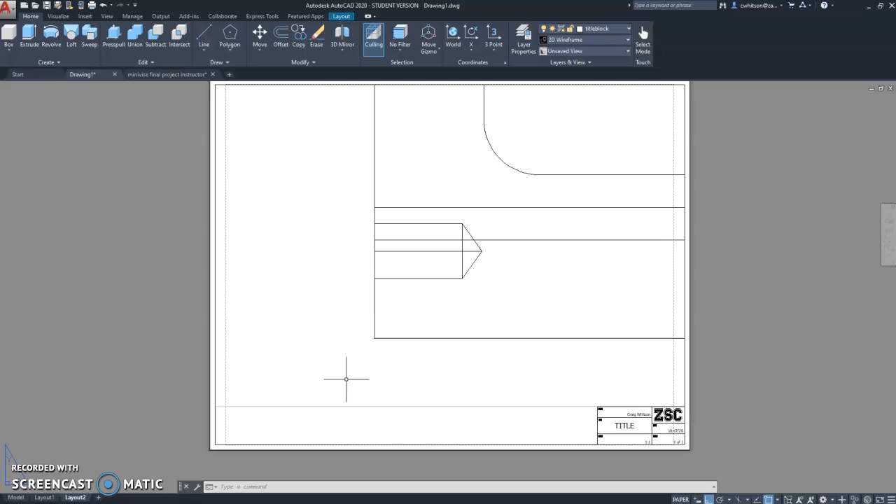Right now I have my layout set up as you probably have, with an A size sheet and a C size sheet, which we've used earlier in the semester. When dealing with 3D projects, we don't need a viewport, so I'm going to go with my C-sized sheet. First I'm going to select that viewport and delete it. We do not need that.

Let me show you what I think is probably the simpler way to convert our model into millimeters. This is a way I've recently discovered that is a lot easier than what I posted before on Blackboard. But actually, to do that, I think I'm going to need my viewport back. I guess I wasn't thinking far enough ahead. Let me hit undo to bring that back so I can double click inside the viewport to activate it, which gives me my list of viewport scales down here.

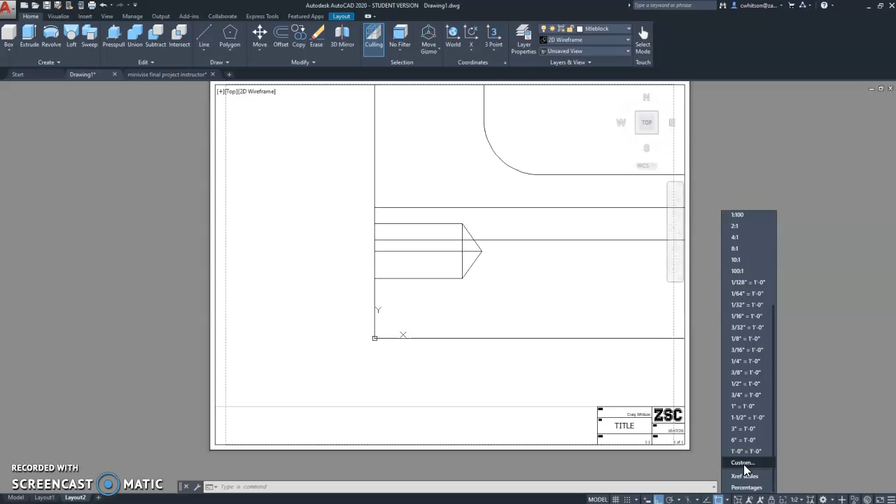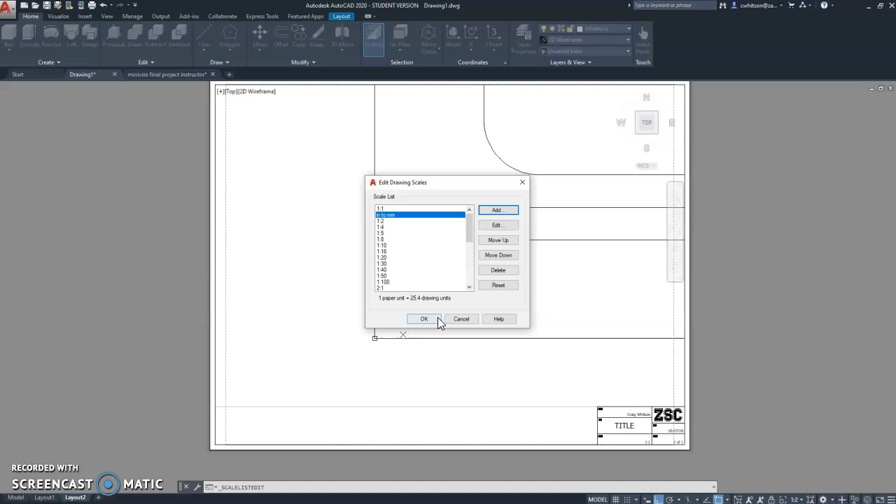So I want to create a custom scale, and I'll add a new one - doesn't really matter what we call it, inch to millimeter. One paper unit will be 25.4 drawing units, and that is the conversion from inches to millimeters - there are 25.4 millimeters in 1 inch. I'll click OK and OK.

Now that I've created that scale, I can select my viewport and get rid of it. Since we're not using viewports, the way we get our 3D model into our Paperspace is to click on this Layout tab and start by placing a base view from the model space.

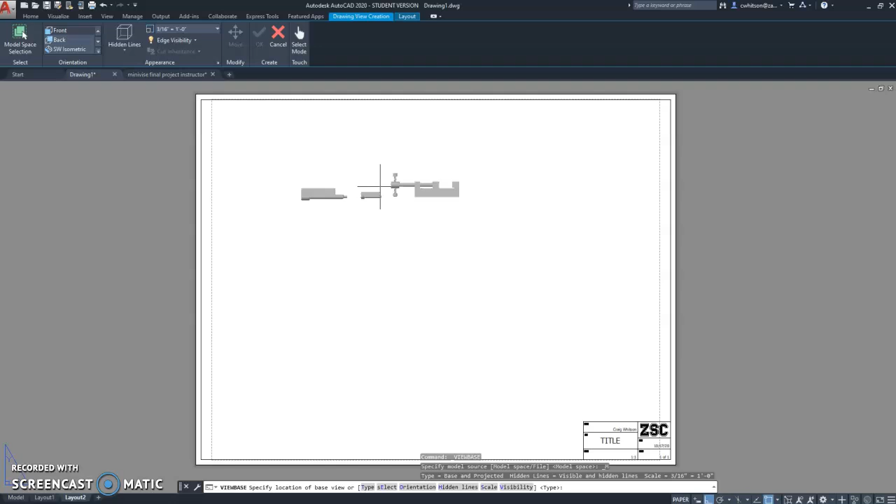Now what many of you have noticed is that when you do this, AutoCAD automatically wants to choose everything in the model space, every single part that you have created there. And we don't want to do that - we just want to place them one part at a time.

So we'll come up here and click on Model Space Selection, and that takes us back to our model space. Right now everything is highlighted - you can see these dotted lines along the edges. Everything is selected, and we don't want that. So we want to unselect everything but what we want.

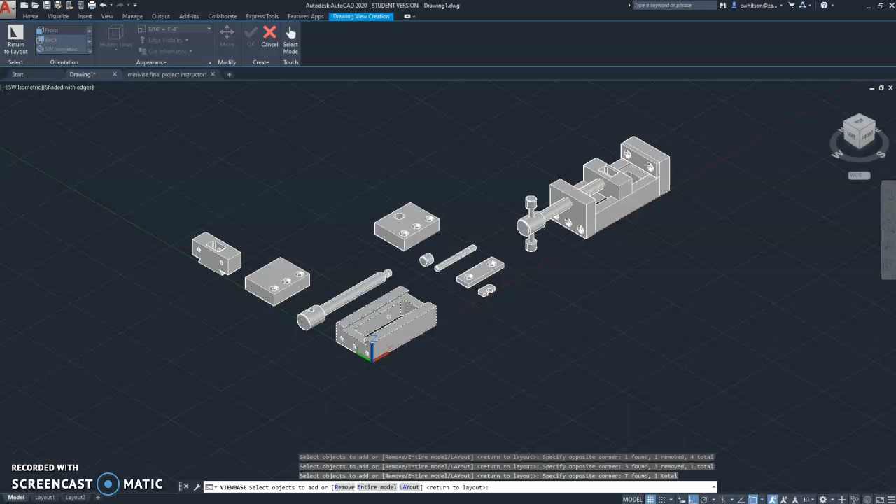If I want to first place my two views of the base, I want to unselect everything else. So I'm going to hold down the Shift button and click on everything else that is not the base. I think I've done that now - I think I've just got one object remaining. You can look down here, it says 1 total. So I've just got one object highlighted right now, the base. I held down Shift and clicked on everything that was not the base.

Now I can return to Layout, and I can choose which view I want to place first. I think I want to place the top view - yeah, there we go, that's what I want to be my front view. Then I'll project the side view from that. But I need to be careful about what scale I choose up here. AutoCAD is going to automatically choose one that it thinks will work, but that's not the one I want.

I want to find the custom scale I made earlier - this is going to convert my inches to millimeters. And then I can just click to place the base view, and move my cursor over to the right to make the right view, and hit enter. There we go - I've got my two views of the base.

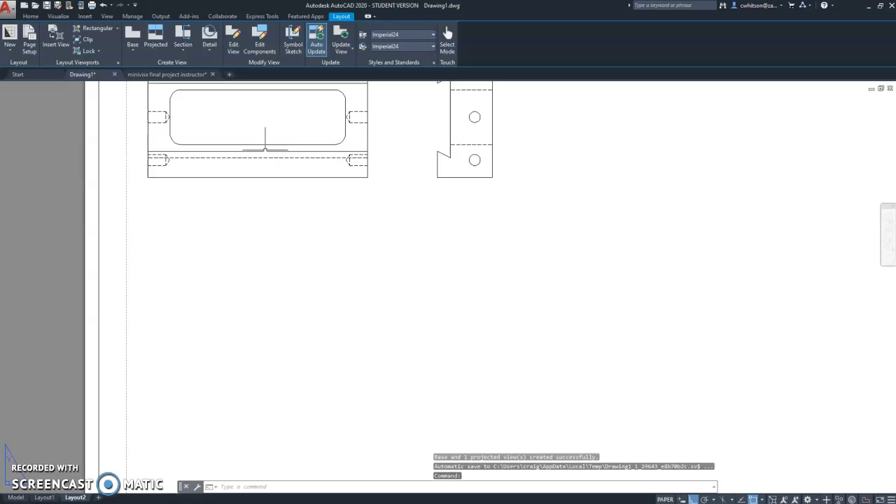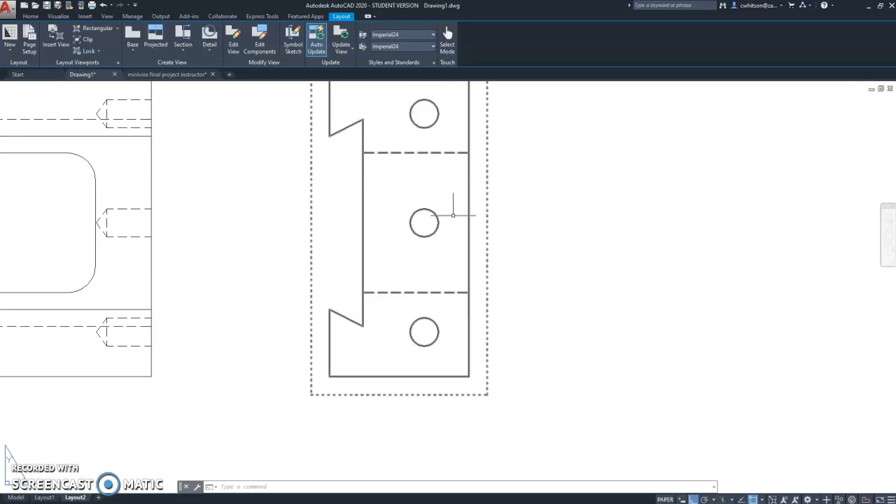So there's still some more I need to do with this. I'm going to need to go in and add all of the dimensions, add center lines. Some students have pointed out, if these are threaded holes, shouldn't we be seeing a hidden line hole surrounding them? And yes, that's not created automatically by AutoCAD - we're going to have to do that ourselves, add that hidden line circle surrounding our threaded holes to indicate the presence of threads. We're going to have to add all the center marks, all the dimensions and notes and leaders and stuff.

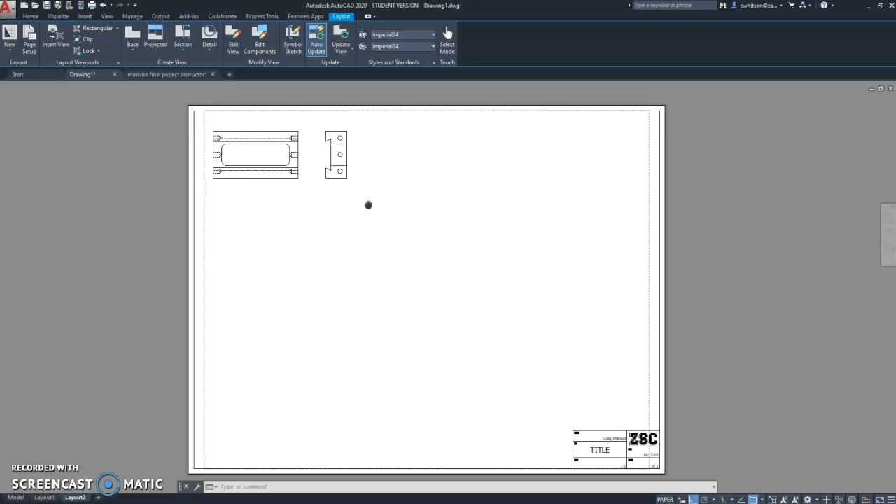But that's how you can place one object at a time. Now, the benefit to doing your model as a 3D model, I think the biggest benefit, is when it comes to that assembly view. So if I place a new base view from the model space, again, go back here to select what we want, or rather what we don't want. Hold down the Shift button, pick all those parts that we don't want.

The thing about the assembly view, depending on how you have it oriented in your model space, the particular isometric view that you want may not be one of the ones in the list you can choose from. So I'm going to rotate around to this particular view. This is the isometric angle of the assembly view that I want. I want to make sure I'm viewing it this way in the model space, so that when I return to the layout, I can choose current as the view that I want.

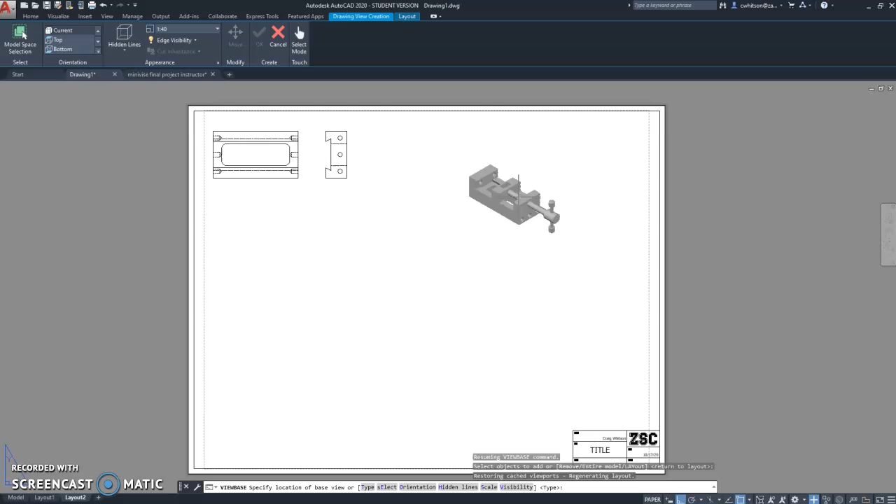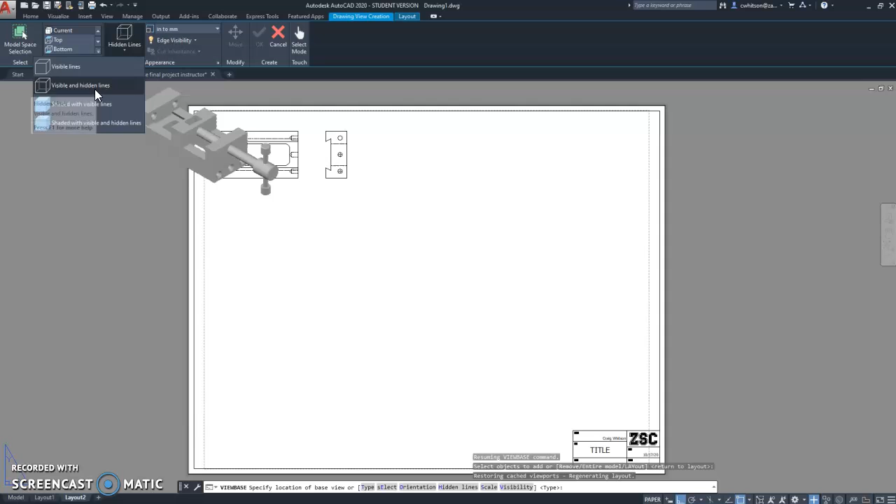Now, isometric views don't always have to be the same scale as the orthogonal or orthographic views, but I'm going to go ahead and use that same custom scale. And the isometric view, I don't want it visible with hidden lines - I'm going to make it shaded with visible lines. Then I can place that up here, hit enter, enter, and there we go. There I've got my isometric view.

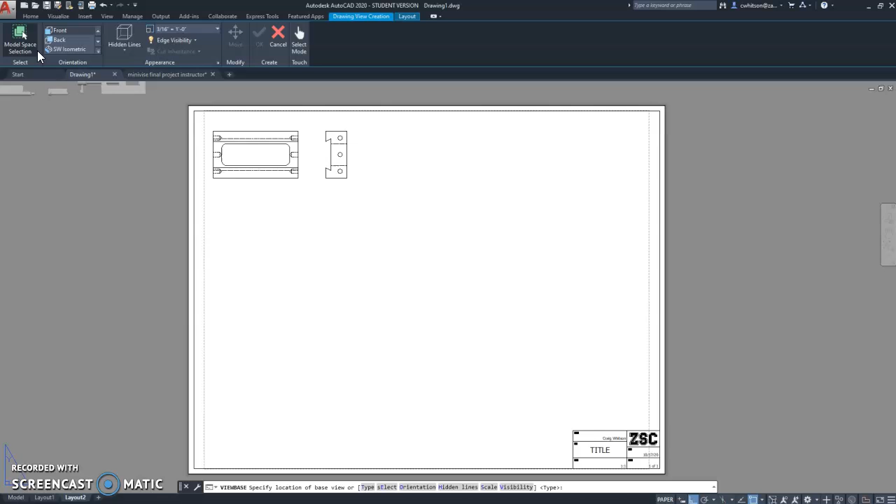Now, if I hadn't set that, let me just undo that. And go back here to select or unselect everything that's not part of my assembly.

If I hadn't changed my orientation, if I was still looking at it from this isometric angle, and I return to the layout, and I choose my orientation - okay, the current view is going to make it like that. I don't want that view.

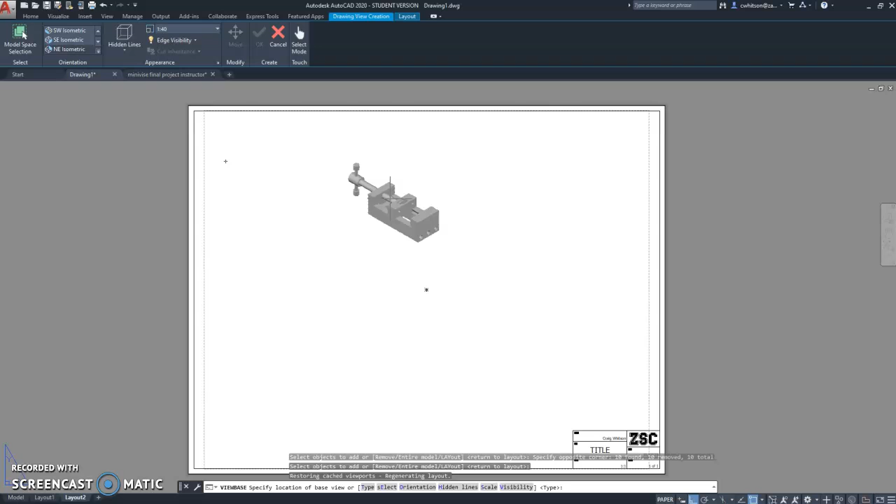But if I look at the other isometric options: southwest, no, that's looking at it from below. I don't want that. Southeast, no. Northeast, no, that's not quite right either.

It's the handle facing the wrong way. I want the handle facing down and to the right. Northwest, no, that's not right either - now the handle's facing down and to the left. I want it down and to the right. So you see, none of these isometric options work.

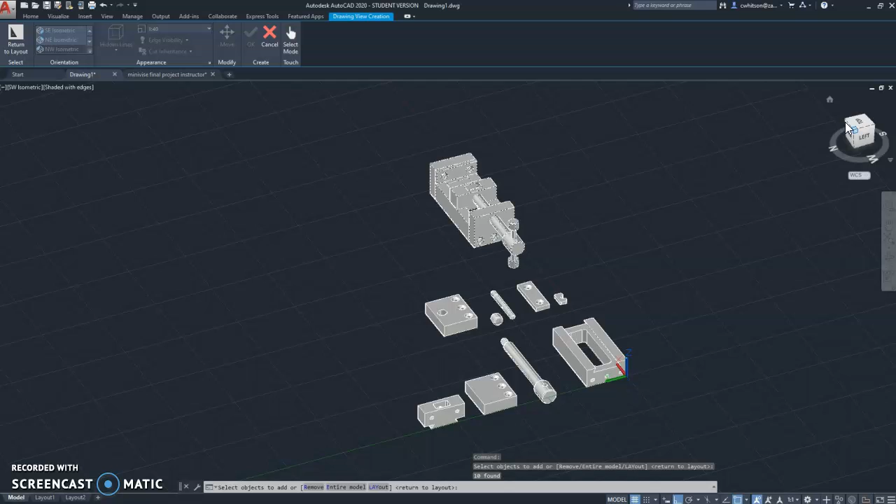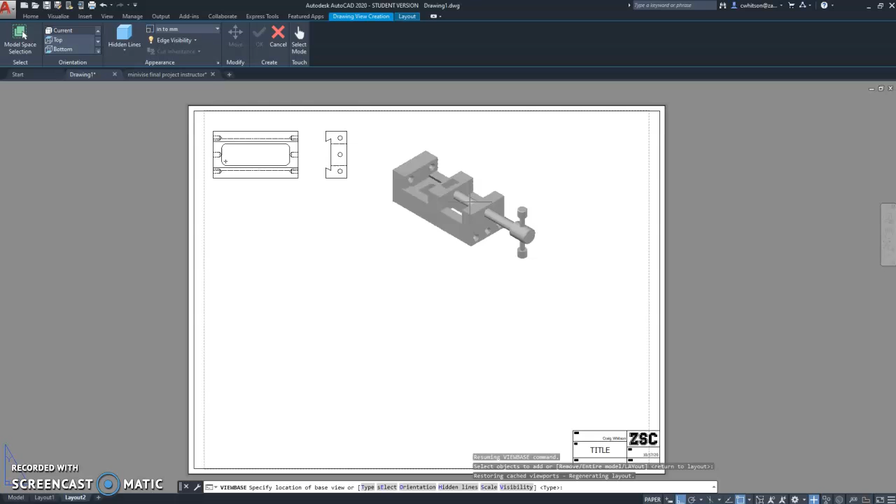So when that's the case, what you have to do is go back to the model space. You have to reorient the 3D model in the model space to agree with how you want it to look in the Paperspace. Then, as far as the orientation options go, choose current, shaded with visible lines, and again I'm going to select my custom scale that I made. Say OK, enter. Alright, so that gets you your isometric view.

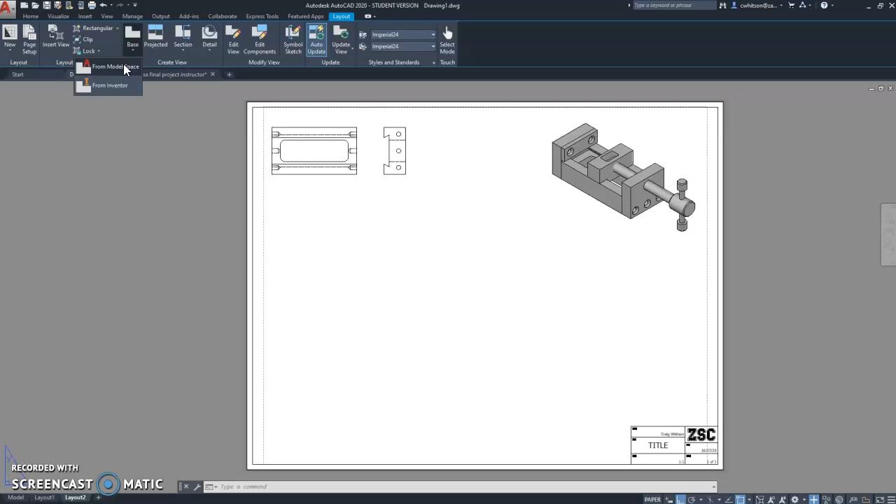And then you just go through and repeat this process, placing all the other views. So I would place another base view from the model space. I have to go back here, and let's say I want the drive screw now. I'm going to have to hold down the shift button to unselect everything else that's not the drive screw, including all of that.

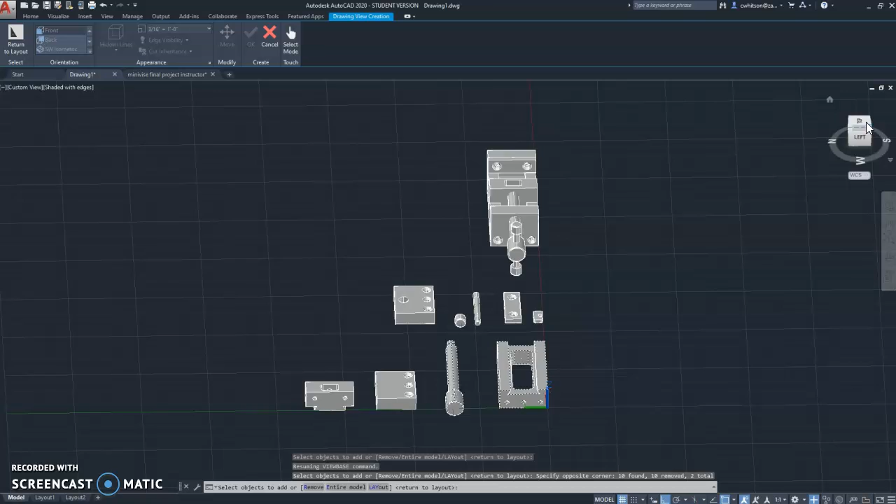Okay, and then return to the layout. And actually, I forgot the base - it looks like there's something in that selection that's not the drive screw. There we go, now I've just got the drive screw. It's really important, don't forget to choose this custom scale.

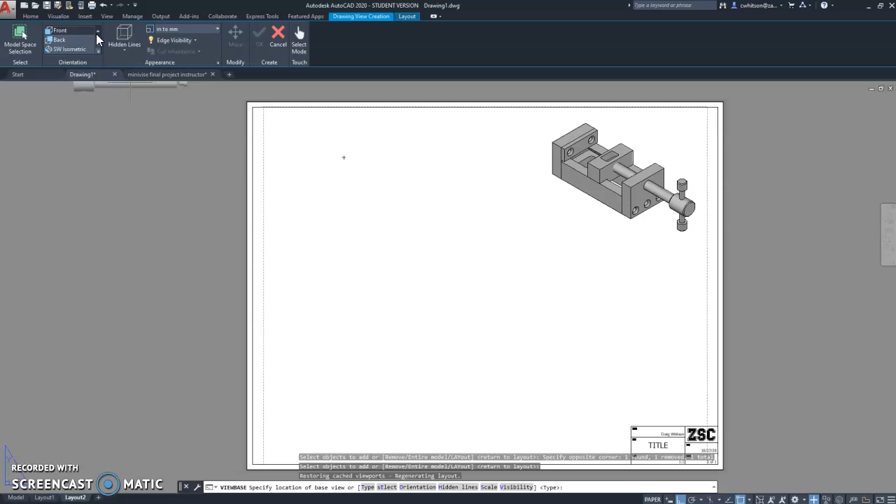Yeah, I do want it to be hidden line. I do want it to be front - that particular view is correct, front view is correct. And I'll just place the front view and the right view. Enter. And there, I've got my front and side view.

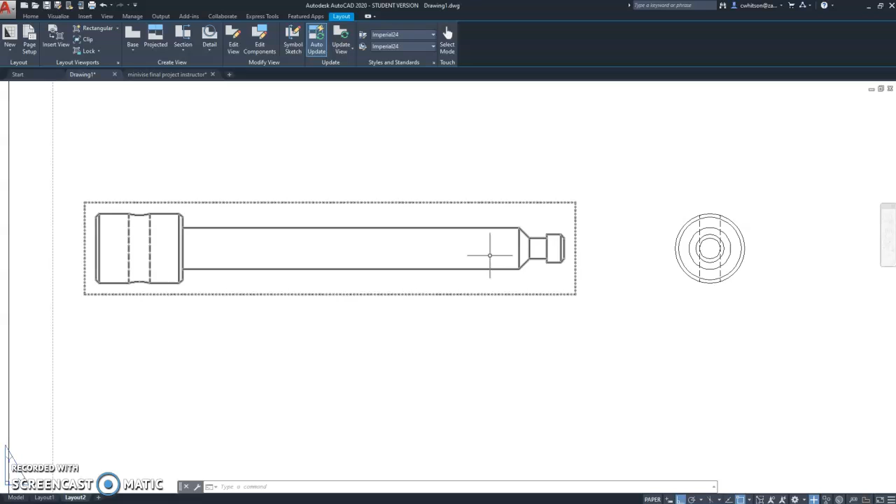Now, the drive screw here is supposed to be threaded, and I have it modeled just as a plain cylinder. So in order to see those hidden lines, I'm going to just draw them in manually. So I'm going to switch back to my drafting and annotation view. I can switch to my hidden line layer.

Maybe I don't want cyan lines. I can change the color. And then I can go ahead and draw a line there.

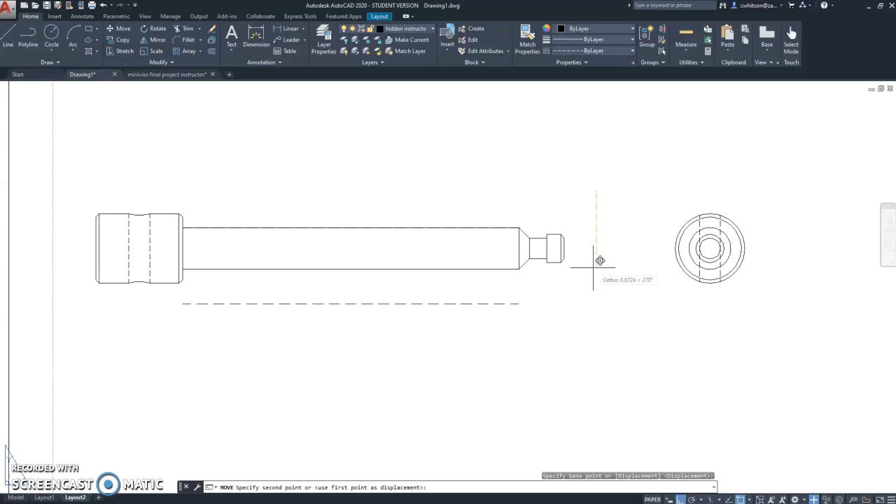Now, the exact placement of the hidden line is not critical. We're not actually trying to literally show the width of the threads. We just want to essentially represent them with a symbol. This dashed line is meant to just indicate the presence of threads. It's not meant to literally represent what the threads look like.

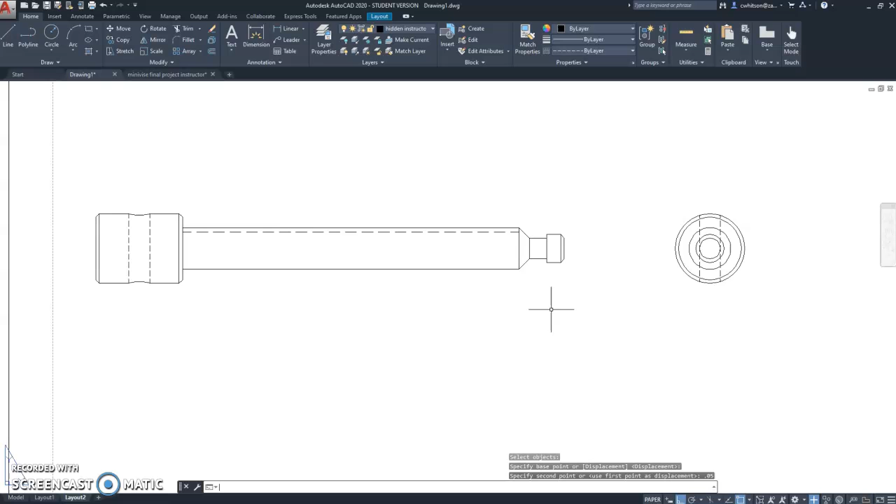So maybe 0.1 - that's probably too much. So maybe I'll move it back up to 0.05. That's getting a little bit better. Yeah, I'd say that looks okay. And so then I can maybe just mirror that line across the center of the part.

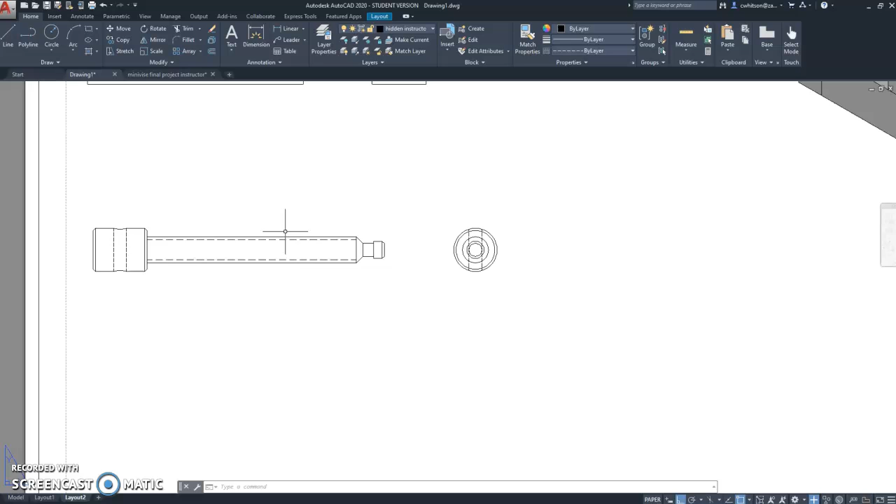Okay, so you'll just have to repeat this for all the other parts. Add the hidden lines where necessary to show threads. Add all the center lines. Add all the dimensions, annotations, the parts list you'll need to add. But that's the basic process of placing our model in inches into our Paperspace and converting into millimeters.

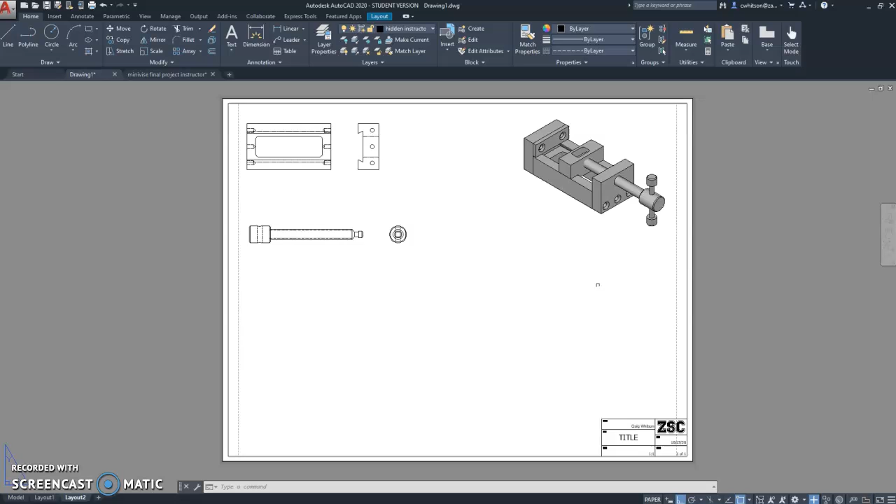I'm not even sure - I don't think I have time in the video to show the other way that I was going to recommend. Maybe I do if I try to do this quickly. But I'm going to recommend this method that I've just shown as a simpler way of doing it. The other way we could have done it is if we had gone to our page setup and modified this layout.

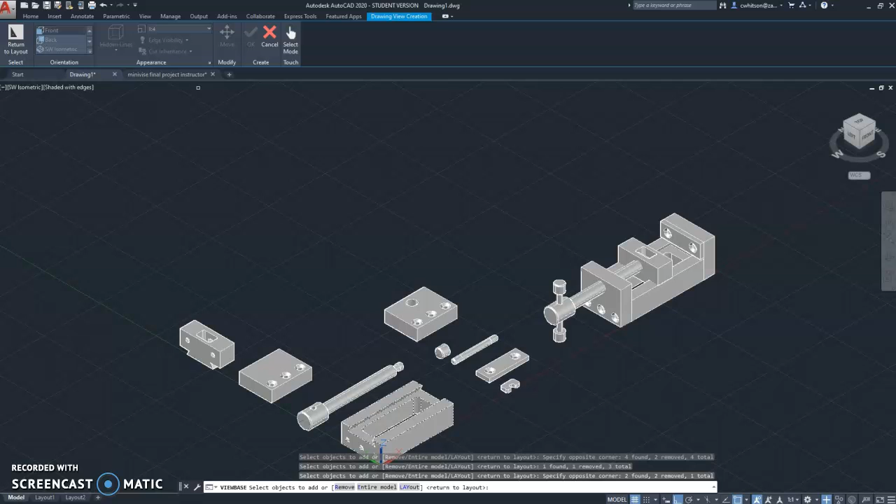We could set our scale here to be 1 to 25.4. But see, that makes your title block really small, so we would have to scale that up by a factor of 25.4. But then what that allows you to do is when you place your base view from the model space and we select what we want and unselect everything else except for the base, then we can actually put it in at just the regular 1-to-1 scale.

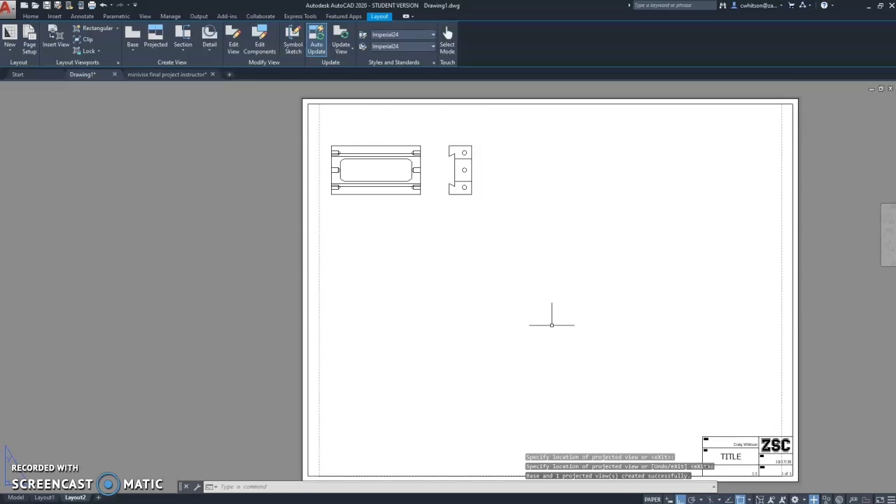So the conversion is done in the page setup rather than in the selection of the scale as you place it. Okay, but I would recommend doing the first way. And if you've got any questions on it, you can email me or post your question to the Blackboard discussion board.